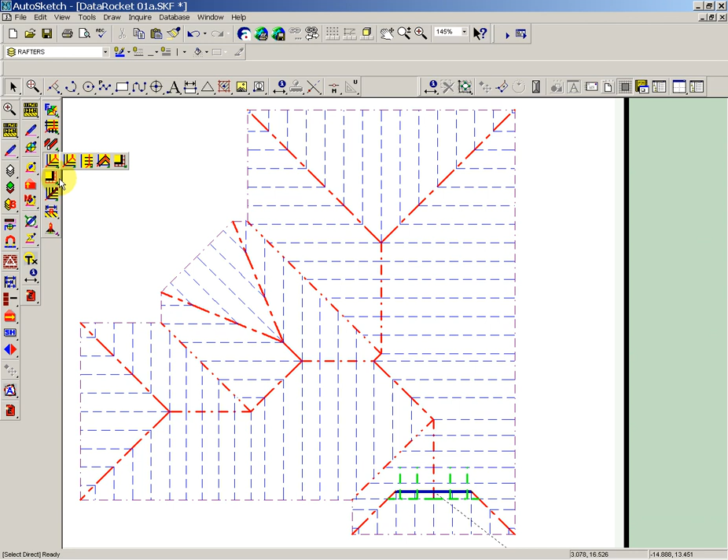And now we go to the underpurlins, collar ties, valleys and trimmers. So first of all, let's have a look at the underpurlins. With the underpurlin, we've got an underpurlin distance from the plate and from the plate to the fascia.

If this was set to say 1.8, and the distance from the plate to the fascia was 0.805, if I go next, I could pick on the fascias and it would put in the underpurlins at a set distance. I'm just going to right mouse click out of that, Control Z, just remove those.

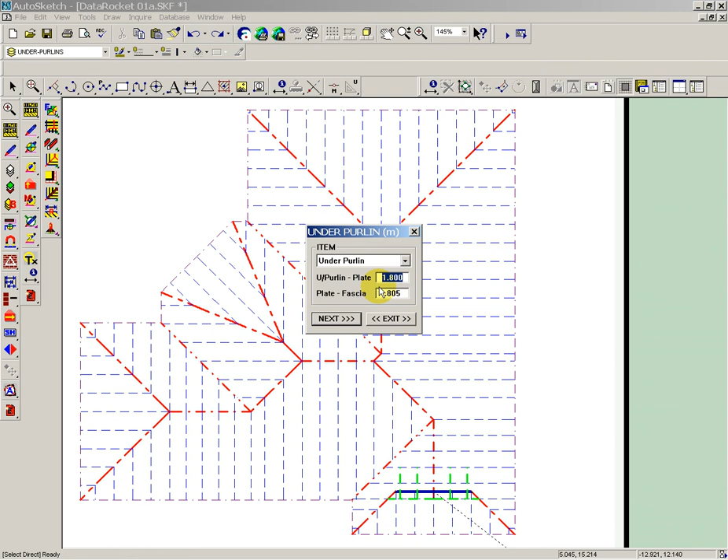The other way of doing this is to put 0 in the underpurlin. So 0, next. Now I could pick on the fascia line and I could place the underpurlin wherever I wish.

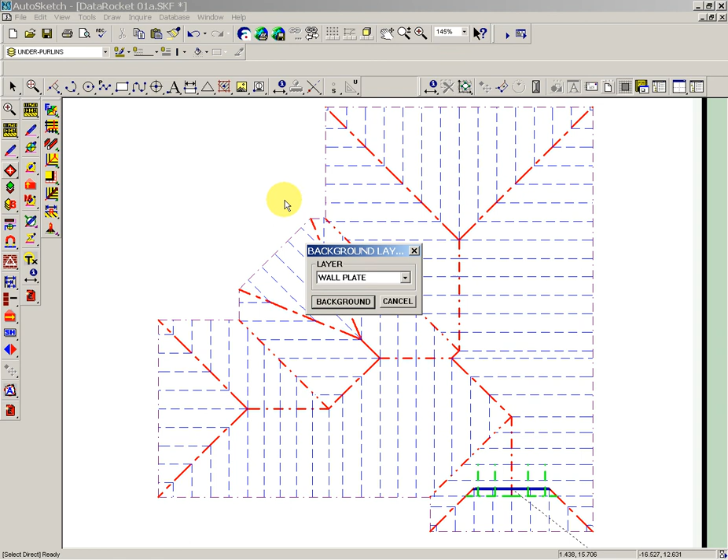Now the only problem with this is that we don't know what's underneath the underpurlin, and generally you're positioning these so you can see the wall plates underneath. So I'm going to use the background from masked, background from masked, wall plate, background, and now we can see the wall plates.

And I can get an idea of where I want the underpurlin to go. I'm going to put it straight on top of this wall here. So underpurlin, 0 in the size, nearest. My underpurlin is straight on top of that wall.

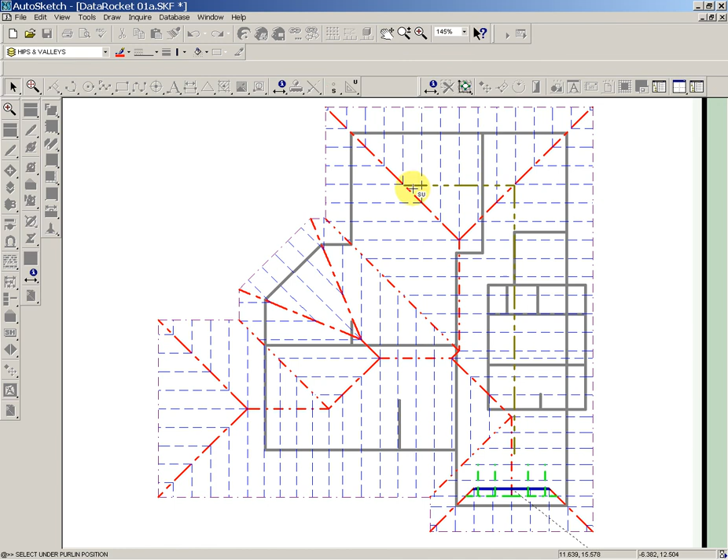If I want this to come across the end here, I could go E for endpoint, and put those in. I'll just come down the front here, so this one can go straight on top of this wall, and that is too long. So we've got an underpurlin that is 8.7 meters long.

I'm just going to turn the wall plates off, just go back to roof. So I've got my underpurlins, and you may have wanted to bring the beams back in on this as well, but I'm just going to turn the beams on.

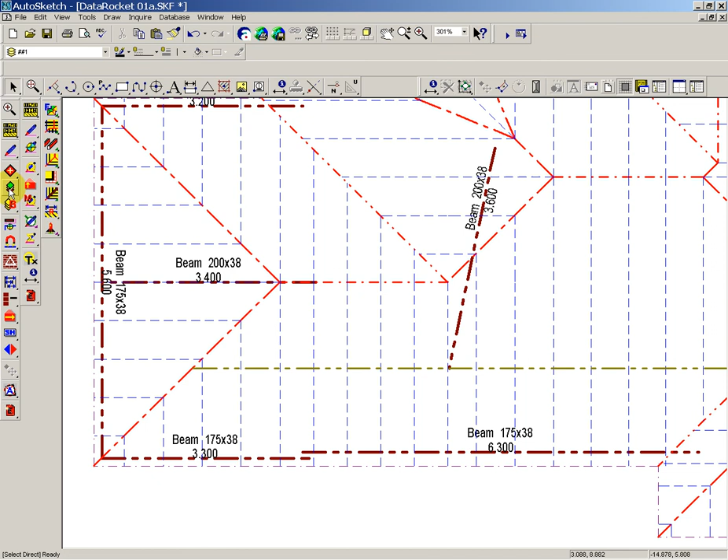And now for the underpurlin. So this underpurlin, like I said, was too long. I might want to make it overlap just here.

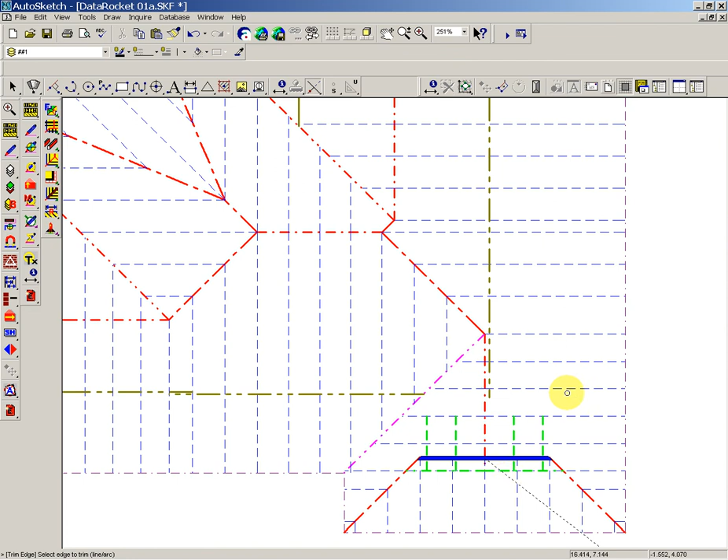So I'm just going to get the same one, put it next to itself, Control. There's 2 there now. Trim to edge. There's one, the other, and trim on the sides there. Same as this one here, I might want to take it all the way through or just stop it level there.

And there's no other underpurlins to go through there, maybe one across the back. If you've just got one across to go across here, set, click on the underpurlin, single line, endpoint, E for endpoint, V for vertical, and N for nearest, and pick on that, and there's that last underpurlin.

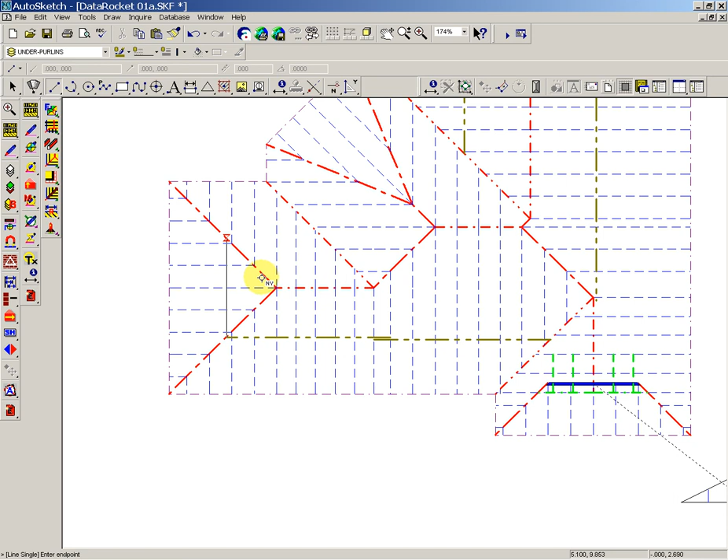So now this one, we can see that we're telling the roof carpenter that we want them spliced in between those 2 rafters.